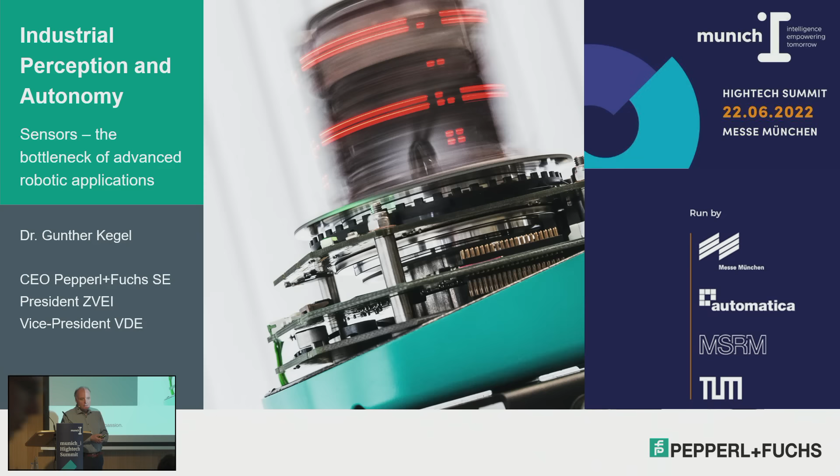Let me tell you a story that started more than 30 years ago. When I was a young scientist, we had at my alma mater in Darmstadt a science conference, and the young scientists were presenting their first ideas about AI. At that time, neural networks were still called amorph memories and stuff like this. Really the old days, and it was actually before AI was dormant for quite 2 decades before we had the computational power to restart everything from scratch.

Even there, we already postulated, well, it should be possible for us to beat a master in chess in 10 years, so by the year 2000, and a master in table tennis, or let's call it ping pong. There was self-confidence of young scientists over there, and guess what?

We managed the chess challenge pretty simply because of Moore's law. We had every 18 months duplication of computational power, and so the old algorithms of brute force actually did the job. We didn't do anything new, no new algorithm, nothing, just the old stuff with higher computational power, and the thing was done.

And what about table tennis? We have motorless drives, even robots that can actually move their kinematics in a way that they can hit a ball as precisely as a good table tennis player.

Unfortunately, we don't see the ball. We have absolutely no chance to predict the curveball. Unfortunately, the ball is white, it doesn't have any markings, so you can't see the momentum, the drill, the spin. Nothing is visible for you.

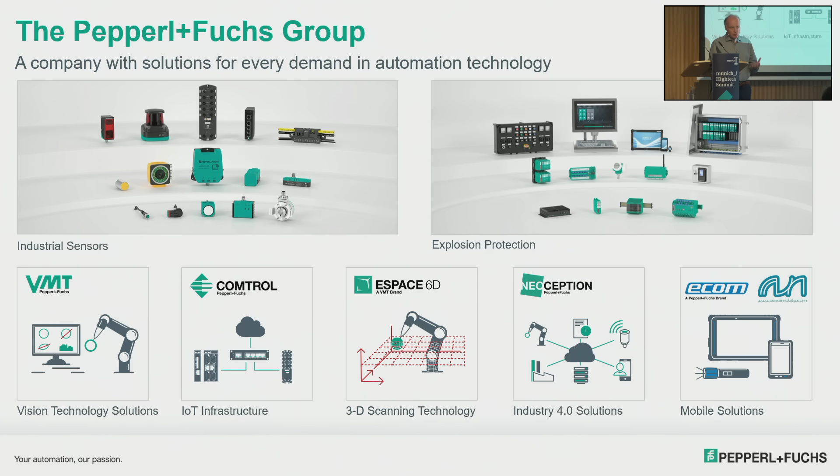So we are not having a lag in regards of AI algorithms. There's plenty of it, and we can use them, but we don't have the natural data, and it's coming from sensors which are simply too poor to generate the necessary data that artificial intelligence actually requires.

So we need to go on and do this, but unfortunately our own market, the industrial market, is much too small. If you would ask us, well, why don't you build a terahertz sensing platform like we just learned from URY? Because it basically absorbs several hundred billion dollars and the entire industry isn't able to finance this. So we need the impact, we need the technology transfer from other sectors which are much more quantity intense, such as gaming, very important for us.

There wouldn't be a simple memory device just for the industry purpose. Memory chips were going down in price when we all started with the first gaming computers like the VC20 or C64 in the early 80s. That was the starting point for developing cheap memory capacity chips.

Same with automotive. Each car today already includes 960 chips, so they are actually going forward. When they talk about autonomous driving, they need dramatically improved sensing capabilities.

We learned it this morning. Driving in a circle in Indianapolis, that's nothing but autonomous driving. I mean, do this - you don't have to go to Indianapolis to find the necessary traffic conditions. The inner city of Munich is already enough. With the many construction sites that they have, I can guarantee autonomous cars of today wouldn't run a single meter. They would immediately stop because they can't interpret what is around them.

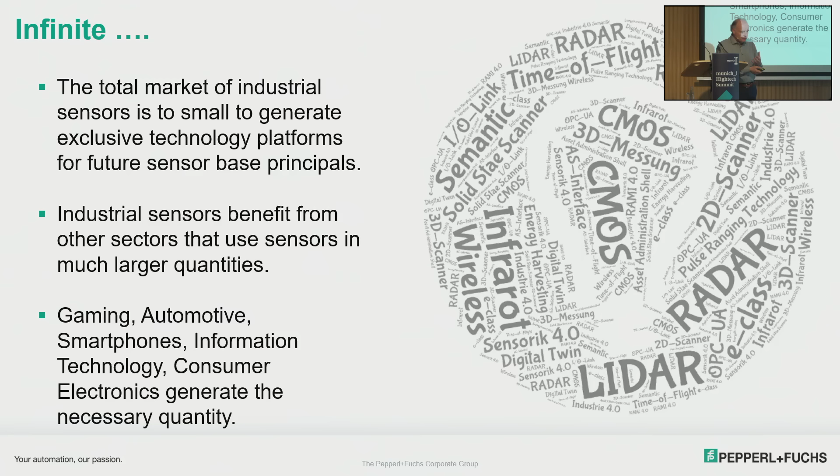So we need this in the industry, but we need it from other sectors because our quantities are simply too small to justify these massive investments. And what will it be? Now, LiDAR technology, for example, is something that we developed to a certain degree just for an industrial purpose, and it took us over 20 years to come up with LiDAR that really uses time-of-flight technology in a way that is applicable for industrial purposes.

Nobody buys this at a price of 20,000 euros. It has to be down at 2,000 or maybe 1,500 euros.

This is an accident, actually. The approach was that the inner city of Karlsruhe had some traffic accidents with the trams in recent years because the tracks were blocked, and that made the tram go out of the tracks and hurt people. So they wanted a sensor that could look at the tracks before the train arrived, as a kind of perception of the last meter. We installed it, but not in this way, but perpendicular to this, so that it could actually see the tracks. Accidentally, it scanned the entire city of Karlsruhe by moving through it.

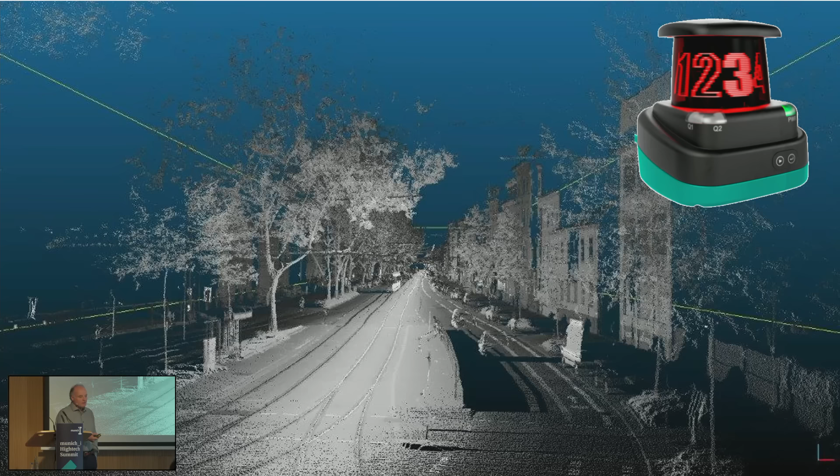But this is already something where you can apply a lot of specifically machine learning, deep learning algorithms to actually do something with these pixel cloud data. So that's much more in the direction of what we heard from UOI this morning. Simple sensors generating massive pixel cloud information, and then AI algorithms doing the job to interpret it and understand what's really behind it. So this kind of technology is a candidate for a more general or more universal sensor.

What we in industry do is take this technology and again slim it down and reduce it to serving just one application. For example, these transportation robots always have a problem if there's a forklift and you basically have a supervision of the floor. You can't see the forklift if the fork is up by only 10 centimeters. Then you simply run into the forklift, as you think the floor is clean, but it's not because the forklift's fork is elevated by some centimeters only. So we use this sensor to just have 4 lines, and that's enough to check out whether there's a forklift and to identify a pallet and stuff like this.

So this is not a universal sensor anymore. It has the same time-of-flight LiDAR technology, but it's reduced into an application-specific requirement, by reducing the universal behavior of the sensor. But this also means it can't be used for anything else but just this particular information. So we can do other things like guiding structures because we are in an industrial environment, and don't forget, industrial environment is highly artificial. It's not like an environment for humans where everything is designed for human perception, recognition, and prior knowledge. Our industrial world is much simpler and can be handled with much simpler sensors.

For example, this is a system where you actually have these QR codes stuck to the ground, and the sensor makes sure your AGV, for example, has correct positioning. The nice invention here is that it's fail-safe positioning, because we use multiple colors in the QR code and blend in and out the colors, having redundancy this way. So we make sure we are not misreading these QR codes and have a safety integrity level 3 as functional safety. So you can use it for positioning AGVs even when there's human traffic around.

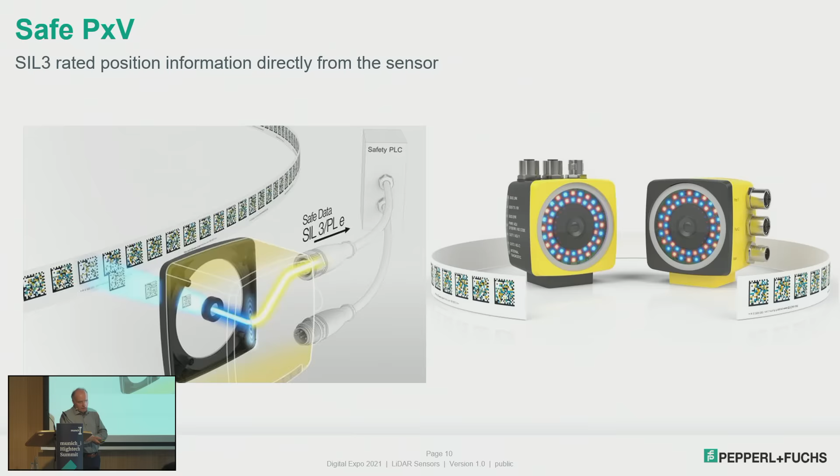We all know this from optical illusions. How often are we actually tricked by optical illusions with our stereo cameras? By the way, our stereo camera has only a base width of 10 centimeters, so at a distance of 10 meters, this isn't helpful at all. But still, I'm able to know that this tree is farther away than the other. How do I do this? I can do this even with one side blinded, because I know how to interpret light, shadows, and these things.

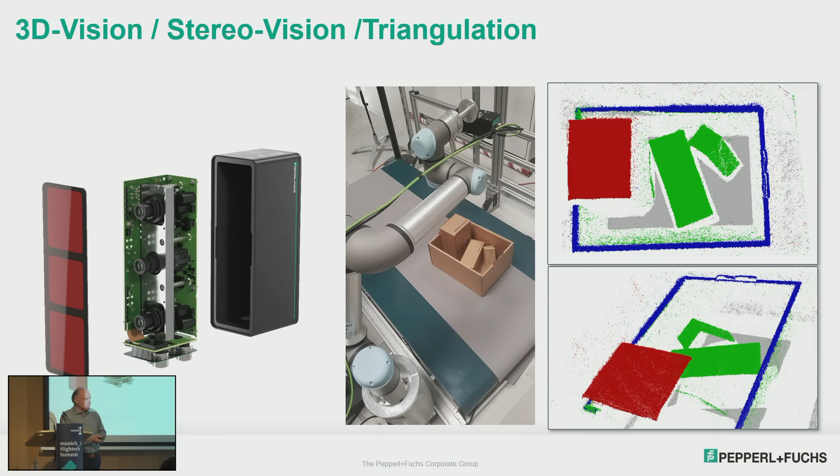That is a priori recognition capability that I have that robots lack. Maybe we can learn this with AI. Maybe we can learn this with deep learning.

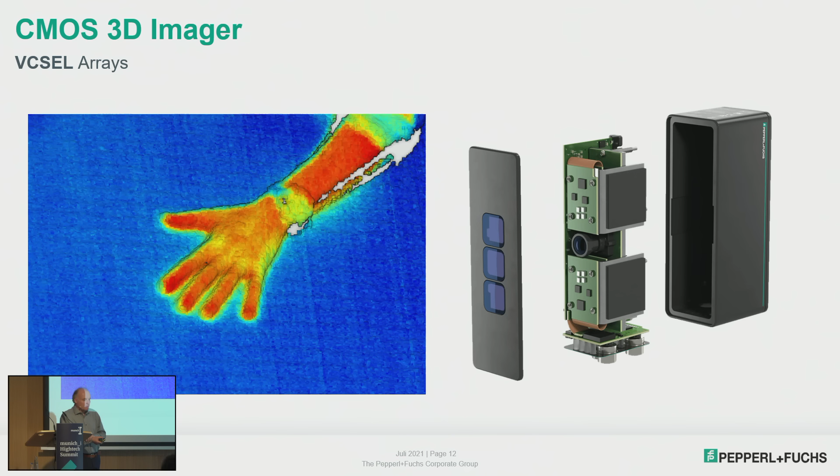We are going into the direction of higher resolutions with these VCSEL arrays. These are the active illuminating chipsets behind that look like these 3D imagers. They are extremely poor at the very moment, very, very sensitive against ambient light. So whenever there's sunlight coming into the plant, forget your imager, it doesn't work any longer.

So we still have to work some more generations to have 3D imagers. We hope that the information and communication people will integrate them into the next iPhone, that your iPhone doesn't take simple pictures, but 3D holographic pictures. If that's an application, quantities will run into infinite numbers. This could be a technology we can apply nicely in the industry to really obtain more universal sensors. And then we could basically have an entire manufacturing surrounding in a 3D image.

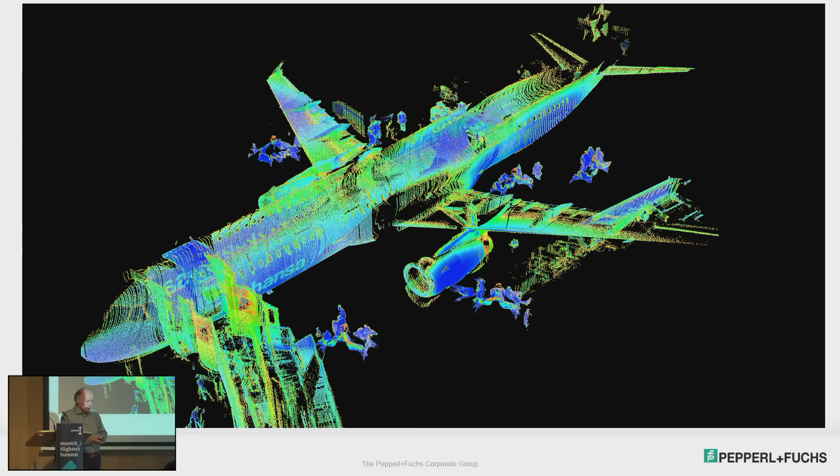That's already a 3D image, but it's not real time. It takes something like 20 seconds to get an image of this, and this is only for demonstration purposes. But actually, we are currently using this kind of technology in the major assembly of aircrafts, because this is today a completely manual process that takes several days to have the right alignment of the different body parts over there. And you can automate this if you only have 3D pixel-related information of the entire machine.

You can see the different images. We even combine the time of flight 3D measurement with photoelectric color information. We call this Pixel Plus, because that makes it easy for humans to follow what the machine is doing, because we are very much linked to these colors. Machines are not, and therefore we at least have a nice way to actually show this at any kind of human-machine interface in a nice way.

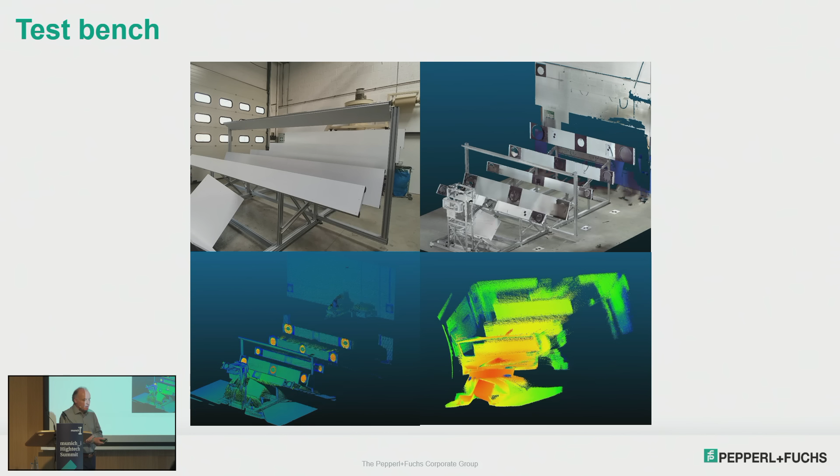But interpreting such a scene and then understanding what do I need to do over there is something highly complex and yet not solved. And that's where AI actually kicks in.

So let me summarize. Sensor technology development is still the bottleneck and prevents faster progress in advanced robotics more than any other technology. It's not that we need quantum computers or whatever blockchain technology. First of all, we need better sensors if we want to proceed. We need to put effort in developing the next generation sensors.

And yes, terahertz sensors will be something like this, but we are not talking about 2 to 3, but 20 to 30 years before we have this technology. I can tell you because I went through these last 30 years, and we had the same assumption 30 years ago. We will do all these jobs in 5 to 10 years, and even 30 years. We haven't been able to do this.

And science, especially automation science, is not like a ketchup bottle, where you basically put and somehow plunge into there. It is a continuous process of improvement, and therefore I don't think that we should have high hopes that all of a sudden there is the universal sensor and there is a universal interpretation. It's hard work on science, and it's hard work in industry to do so, but I think there is a continuous process of improvement, a continuous process of having better sensors, but it's not so fast like we all thought 30 years ago, and like we maybe even today still think.

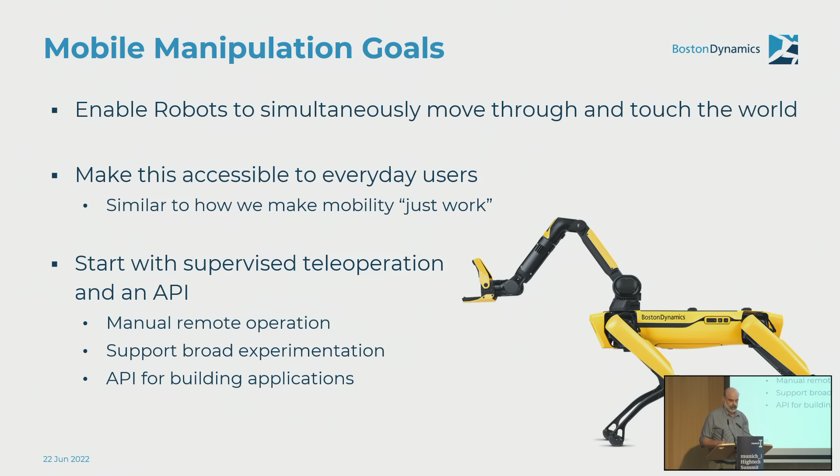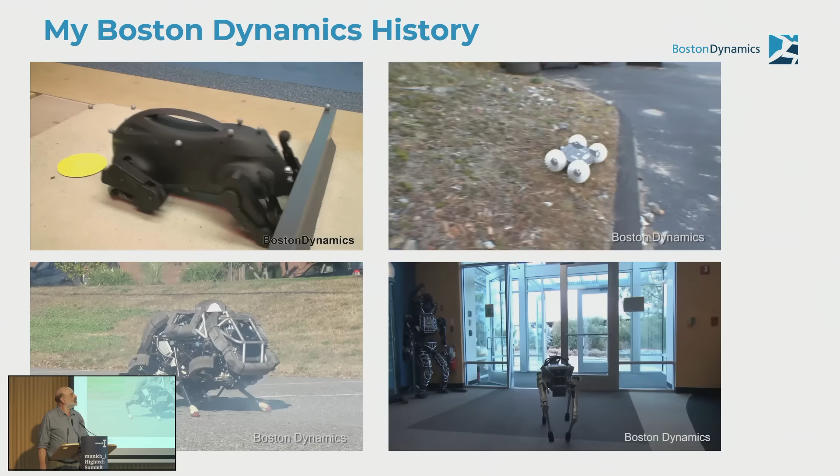A little bit of history. These are projects I've worked on at Boston Dynamics, shown in four simultaneous video forms. The first thing on the top left is a robot called Little Dog. This is actually a project I worked on literally day one when I started at Boston Dynamics in 2006. We had to develop the hardware around this robot and deliver it out to a bunch of university groups who used it to do research on machine learning related to locomotion.

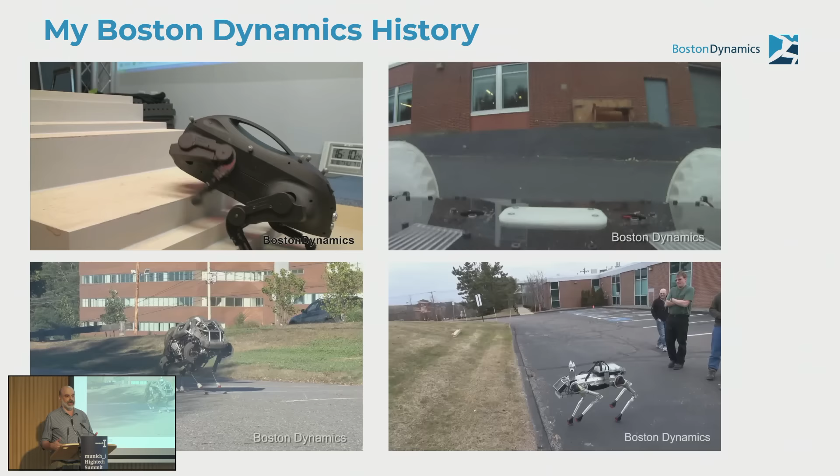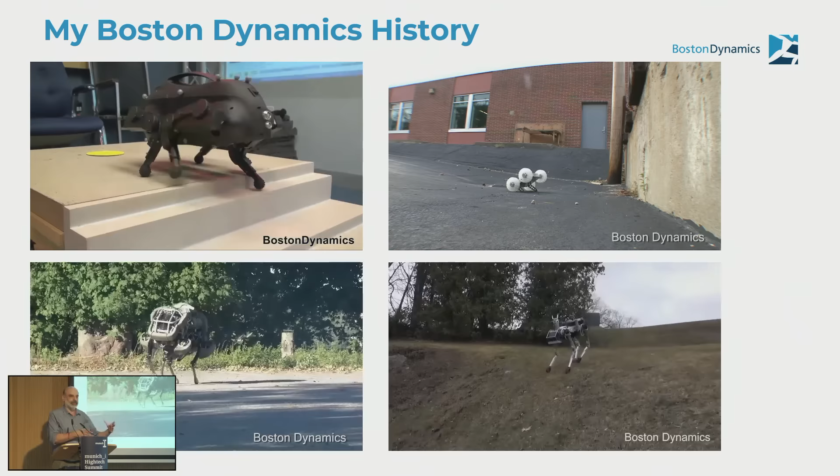The sensing problem was completely taken out of this particular project. The teams had prior maps of the environment they were going to locomote across, and there was an external sensing system, a motion capture system, that kept track of where the robot was relative to that terrain. So there was no sensing.

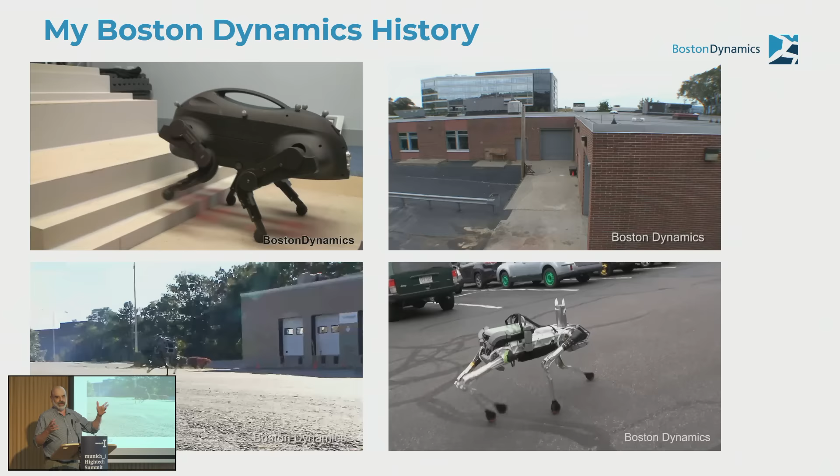The second thing is a robot we call Flea. It's a little differential drive robot, except it can hop, and it can hop 10 meters. It can actually do that 30 times. The trick is, and nobody gets it, everybody thinks we wind up a spring or something. No, that's actually an internal combustion event. There's a piston that we fill with fuel and light off to launch the robot.

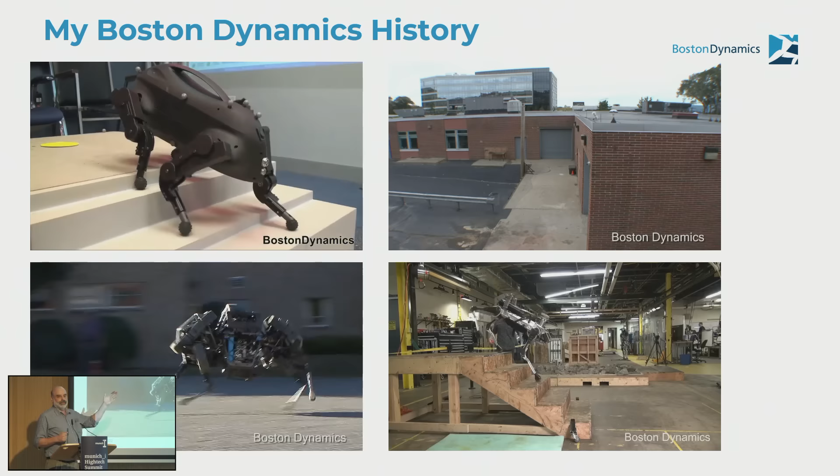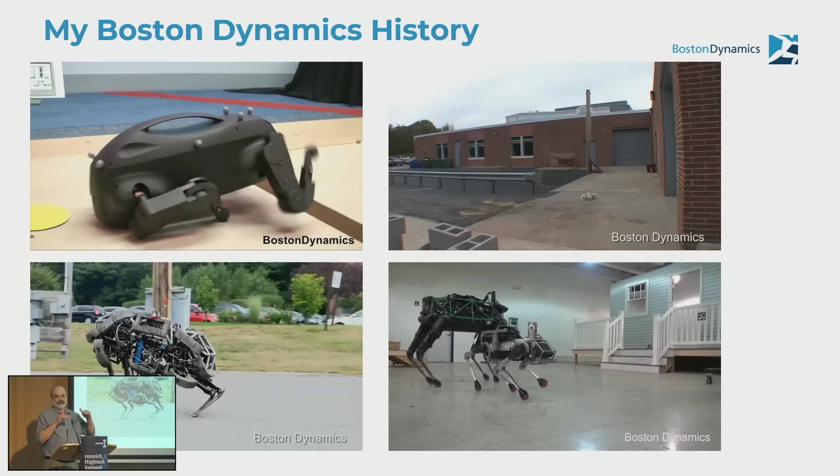The sensing problem here was that the robot needs to land reliably. There's a whole bunch of really creative mechanical engineering in the design of the wheels and things. But we actually had to have a flight control system on the robot so that it could control its orientation and land on the wheels in order to let the wheels work and absorb the landing shock. So there's an inertial measurement unit in the robot, and a relatively simple control system built around that stabilizes the robot in flight.

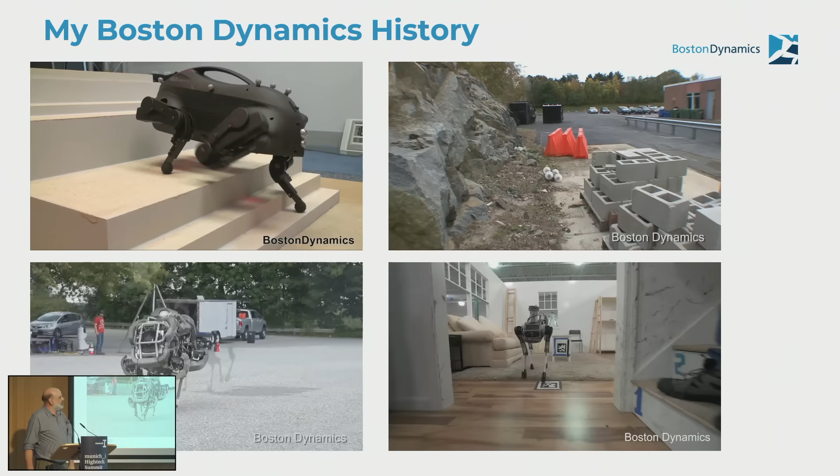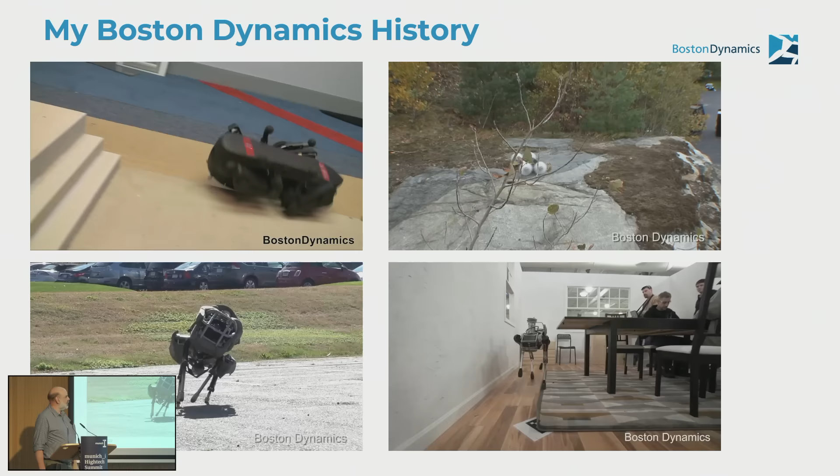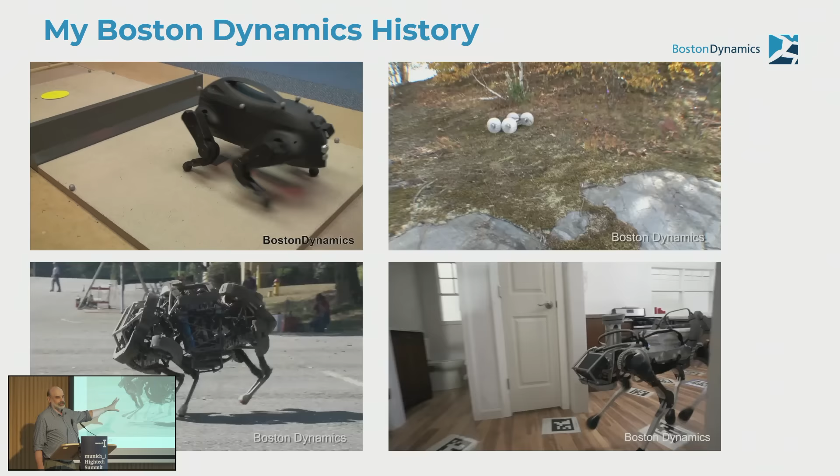The bottom two videos are two of our quadruped robots. This was a robot we called Wildcat. This machine could actually run at about 20 miles an hour across a parking lot—not difficult terrain, not laboratory floor terrain. It was fairly maneuverable, fairly capable. This machine is blind, right? The only sensors it has are an inertial package inside the robot, and then proprioceptive sensors in all of its joints, measuring positions and forces, or surrogates for forces, in all the joints. That's what allows us to run really quickly.

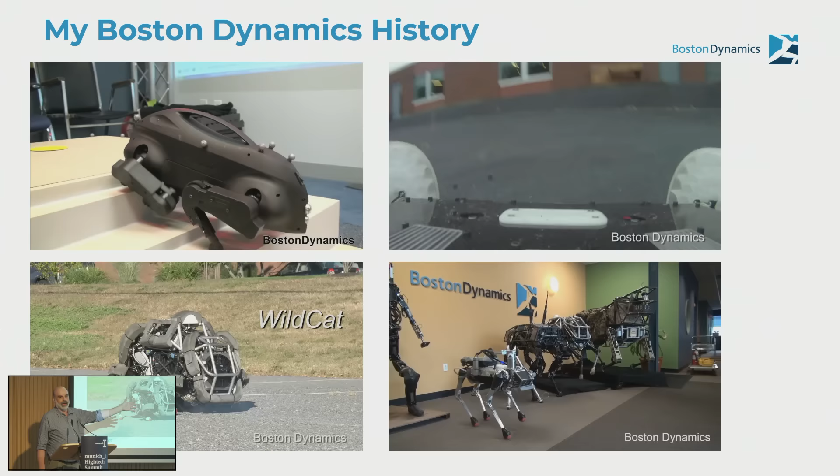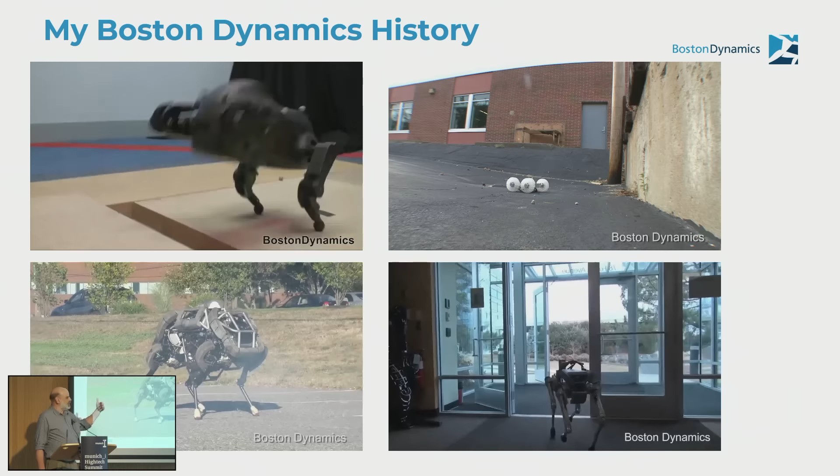The last video, which we don't show that often, is the early prototype of the robot we now sell as Spot—what we internally call Spot version 2. The distinction here is this was the first time we built an all-electric quadruped. Again, the sensing here is relatively simplistic, and yet it has really good mobility capability. That comes from this idea of building these low-level behaviors and capabilities in a very reliable way and building upon those to get to the higher-level capabilities.

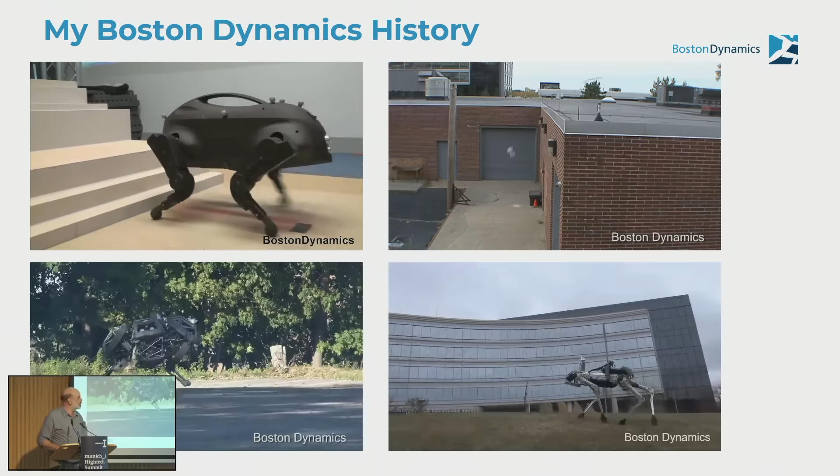So I'm going to talk about how we use sensors in a smart way. We can put a lot of sensing on these robots today thanks to advances in all these different industries and the availability of technologies that I certainly didn't have access to even 10, 15 years ago. Locomotion builds upon this idea of minimal sensing—we have locomotion control technologies that work very well even when none of the sensors on the robot work. It blindly takes steps.

When the proprioceptive sensors are working right and the robot can feel the ground, it walks much more effectively. When some of the exteroceptive sensors, the cameras on the robot, start to work, then all of a sudden the robot can actually plan its footsteps and be very intentional about how it gets through terrain.

As we transition to doing manipulation, the burden on the sensing becomes much higher. Manipulation, reaching and touching the world, requires much more delicate and precise interaction with the environment, and thus more sensing. We're trying to do the exact same thing we did with locomotion: use relatively simple, low-level behaviors that aren't very dependent on external data, and build on those to produce more complex behavior.

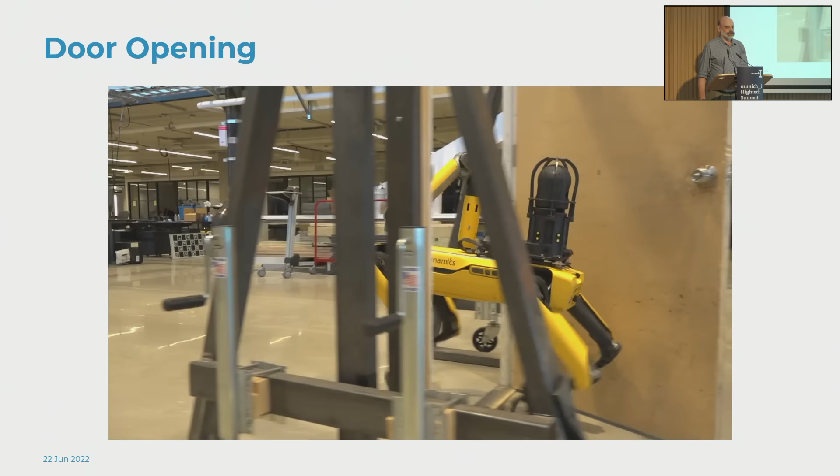So at its core, this is an autonomous behavior. There's a little bit of human input and supervision at the very beginning. Right now, when the robot's looking up, the operator is saying the door handle is about there, and this is a door that opens towards you on the right side. Once the robot knows that, it reaches out with the arm.

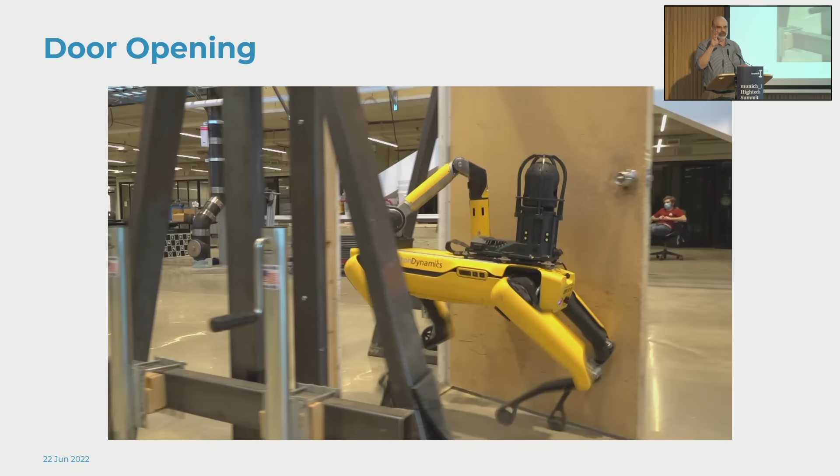The arm has a set of sensors in the end effector, in particular a depth camera, and it uses that to actually find the door handle. It's not using a very precise model for the door handle - it's basically looking for a blob of points protruding above a plane. Once it sees that, it does a servoed motion, a visually servoed or sensor-servoed motion, to actually grasp the doorknob.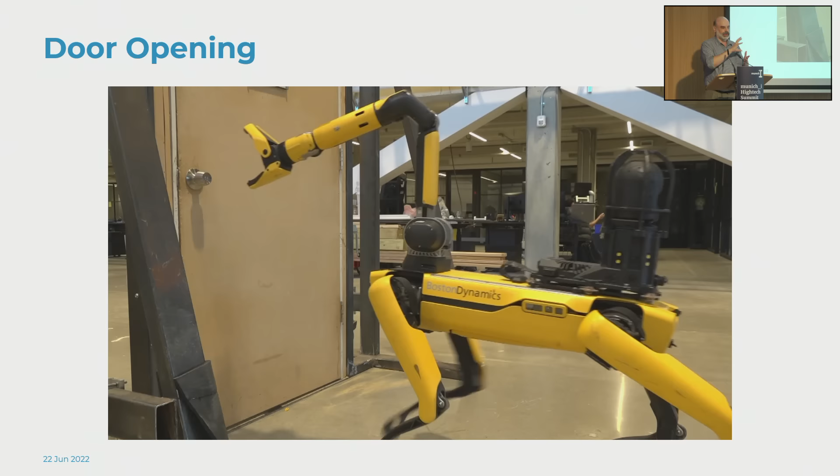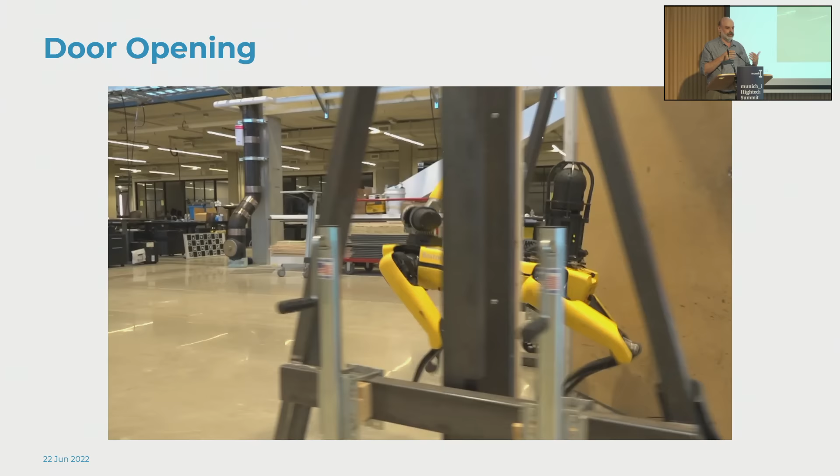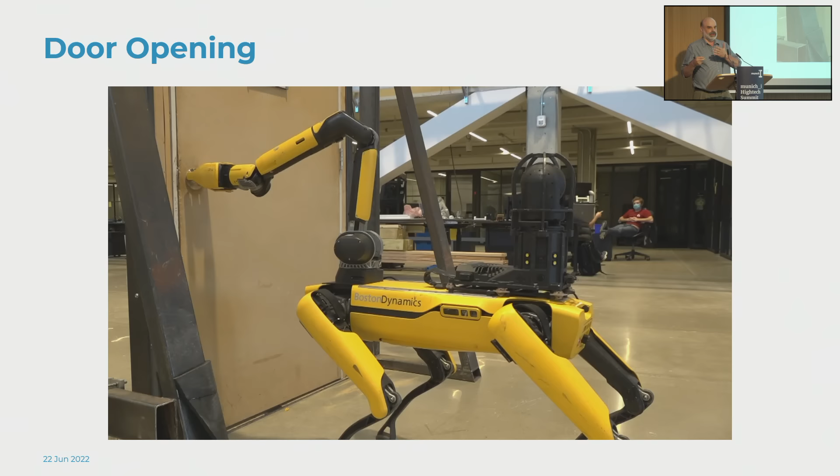Once it grasps the doorknob, it transitions into a set of impedance or force-controlled behaviors that allow it to effectively turn the knob and open the door. If we don't tell it that the door opens towards you, it'll try pushing and pulling to decide which way it actually moves. We don't have a precise estimate for where the hinge is, so it's not highly model-based - rather the machine feels, as it starts to pull on the door, where the hinge is, and as a result knows where to put its foot to block the door and hold it open.

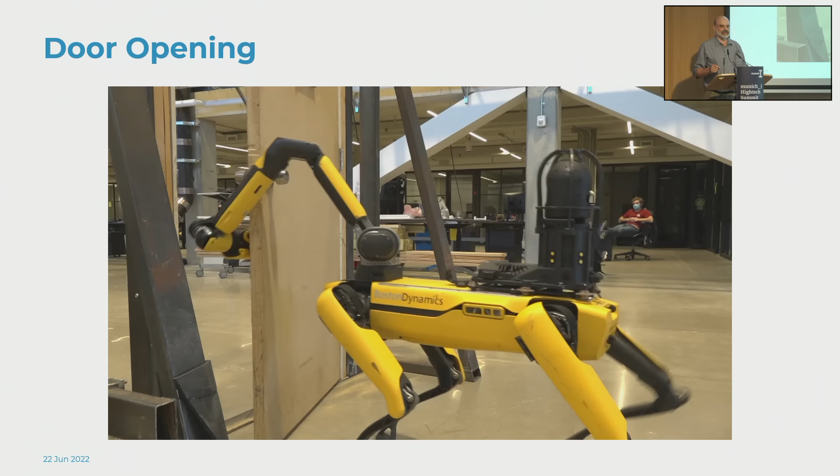So this is that idea that there's a whole bunch of information available to the machine that's not coming from what we would traditionally think of as sensors, which allows it to be effective at doing this kind of behavior.

If you're going to do mobile manipulation, you better coordinate all of this stuff. We really need to coordinate body and arm motion - you see a particular example of that in the door opening case. We do need sensors to help us adapt to unexpected events in the environment. We're relying primarily on imaging sensors and depth sensors, whether those are image-based depth sensors or time-of-flight depth sensors. We'll use whatever fits in the packaging we have available.

We build relatively graded APIs on top of that. If you want to control kinematics of the arm, you can do that. If you want high-level grasping commands, we'll allow you to do that. We'll let you program impedance. The door opening behavior I showed you is something you can actually build on top of the robot as we sell it, up to the point where we put the foot in front of the door - that's the one thing we don't expose externally.

And so this is just a video that gives you a little bit of a summary of what we can do with robots. Yeah, we can play jump ropes.

Those two robots on the end are coordinating, doing things in a coordinated way to swing the rope. We can go out and pick the trash up. This is an almost essentially autonomous behavior, using relatively simplistic high-level vision tools that look through the robot's cameras to find the objects.

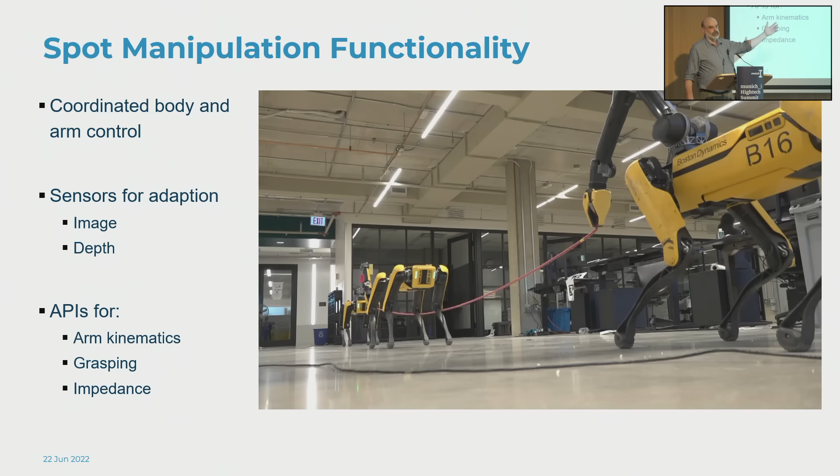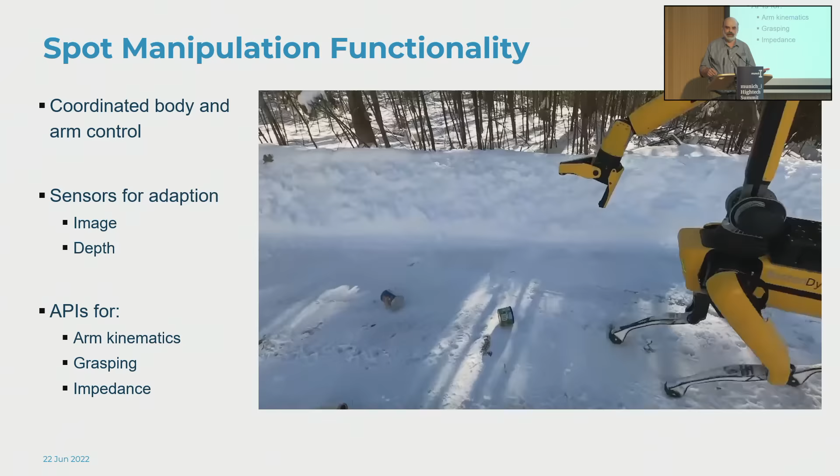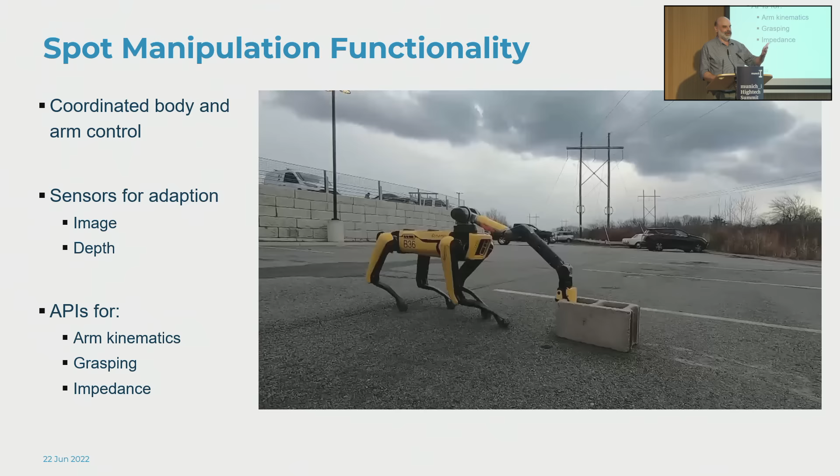We can go do chalk drawings on the parking lot. That's actually a little bit trickier—you need the right kind of impedance control to effectively drag the chalk across the rough parking lot and not get stuck in the cracks. The person working on that had a very strong computer science robotics background, and he said, 'This will never work.' I said, 'Oh yeah, we just got to turn this term on in the controller.' Sure enough, a week later, it all worked really well.

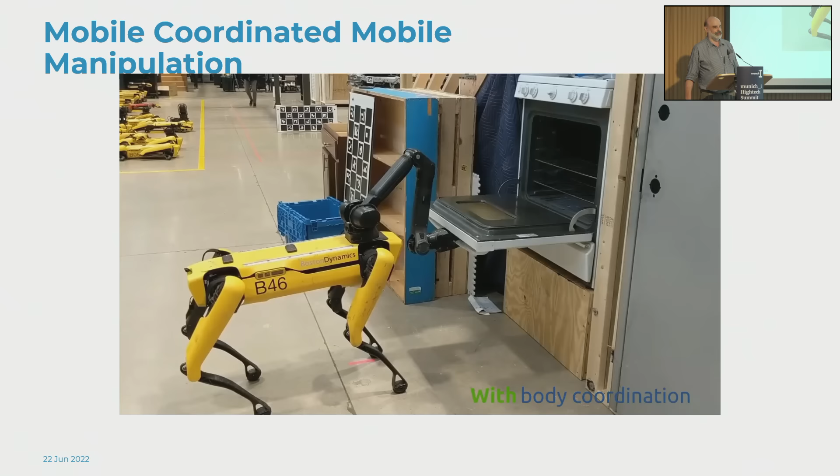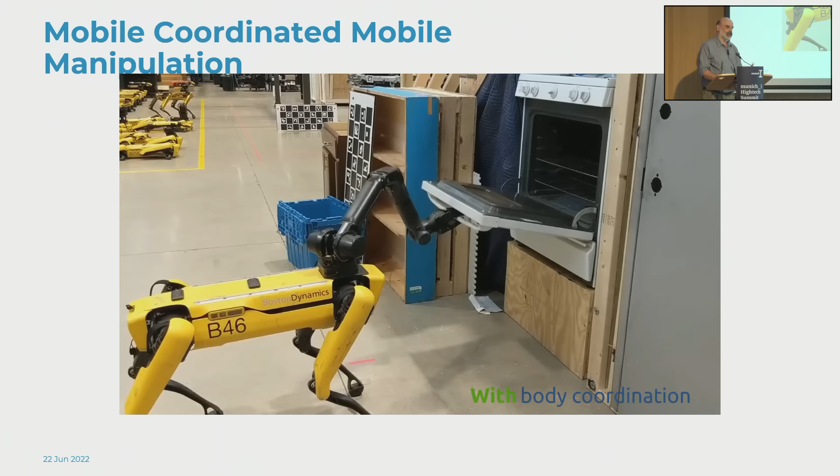That gives you a sense of the kind of things we're trying to do and how we're putting those together with relatively minimalistic sensing, trying to build up towards a capability that really leads to effective autonomous mobile manipulation. I'll stop there. Thank you very much.

It looks like we'll have soon robots that will not only wash the dishes, but also take them and put them in the drawer. Hopefully make the cookies for you as well.

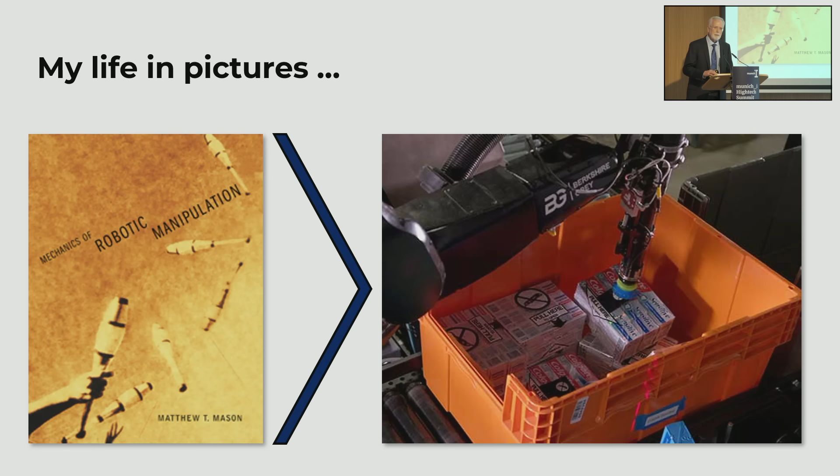So the plan for this talk is to talk about a transition in my life. Most of the time I worked at Carnegie Mellon, and my goal was to publish papers and the occasional book, and sometimes in order to do that you had to do some robotics. I focused almost entirely on robotic manipulation ever since 1976. Then a sudden transition happened, and now my goal is to pick toothpaste out of a bin. So maybe there's something that can be learned. You can view this as setting the baseline and that as the experiment, and we can see whether I learned anything from the transition. I'll talk about that a little bit at the end, lessons learned.

But you might ask, what happened? When did this event happen and why? I can tell you exactly when it happened, it's still on my calendar. On May 6, 2014, I got a visit from Tom Wagner, who is the founder and CEO of Berkshire Grey. At 10 a.m. that day, I thought that there would be no immediate applications of autonomous robotic manipulation beyond factory automation. You can go down a list of different ideas, and I didn't believe in any of them, except for the Roomba — I was right about the Roomba. But some people don't know that the Roomba is manipulation, right? It's picking up little particles of dirt. So that's an exception. And then two hours later, I was convinced.

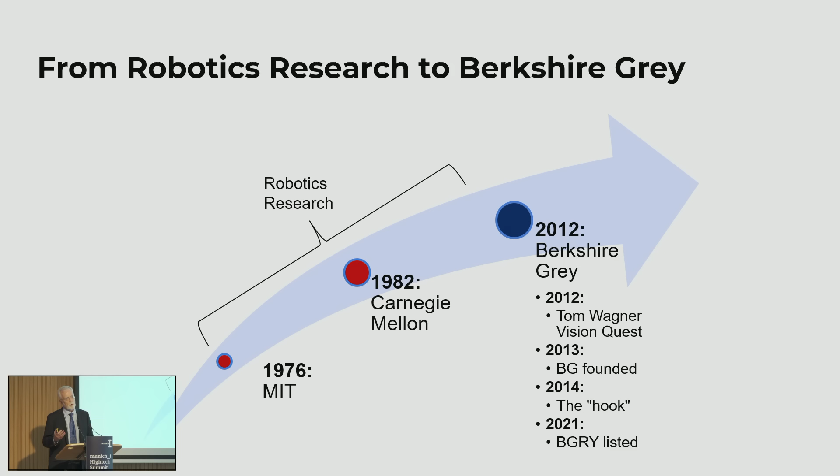But anyway, let's see. So yeah, BG was founded. There's me getting hooked. And then 7 years later, Berkshire Grey went public. We're listed on NASDAQ, and we're actually the first robotics company in the United States to go public since iRobot, like 16 years ago. So I was surprised by that. You would think that was a more common event, but it's pretty rare.

So I'm going to talk a little bit about the technology, and I'm going to show you a few systems working. Where the technology started, the thing that I was focused on

is each picking. And there's a little bit of jargon. There's a hierarchy, a sort of recursive packaging hierarchy in logistics. You have containers or trucks - a truck's just a big box on wheels. And then inside of that, you have pallets. And then inside of that, you have cases. And then inside of that, you have boxes, right? So there's this recursive packaging hierarchy. And then at some point, you get down to eaches. And you could go even further. I guess an each is identified as the thing that you would see on a shelf in a retail store or in a grocery store.

And there are a lot of systems that can pick pallets - we call them forklifts - and systems that can pick cases, these big suction arrays. But picking eaches is special because there's such an enormous variety of things. Just think of all the things you see when you walk into a big retail store. It's an amazing variety, and you need a system that can pick all of them, and that's where we started.

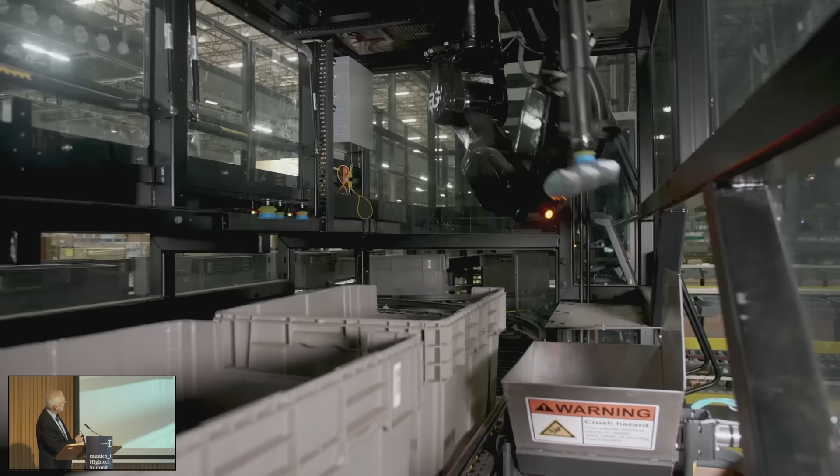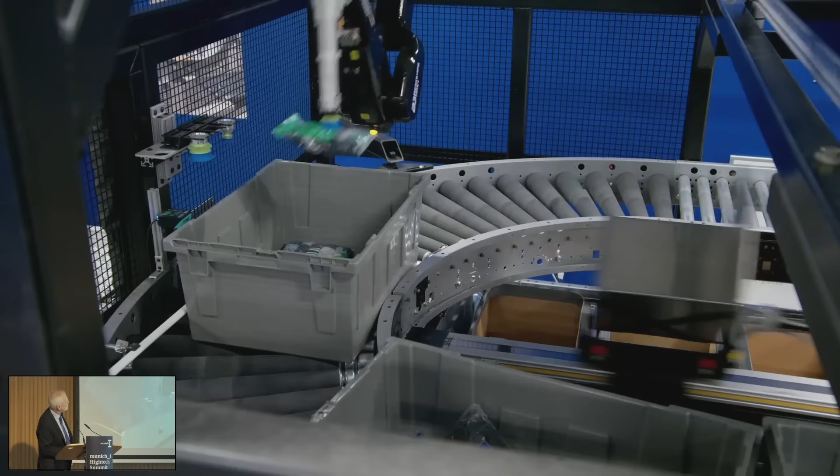So I'm going to show you a montage of several of our picking things, and we'll come back and look at some of these systems in more detail. So there's our gripper, and this is an early version of it. There have been some refinements since then. The point is that it's picking a lot of different things.

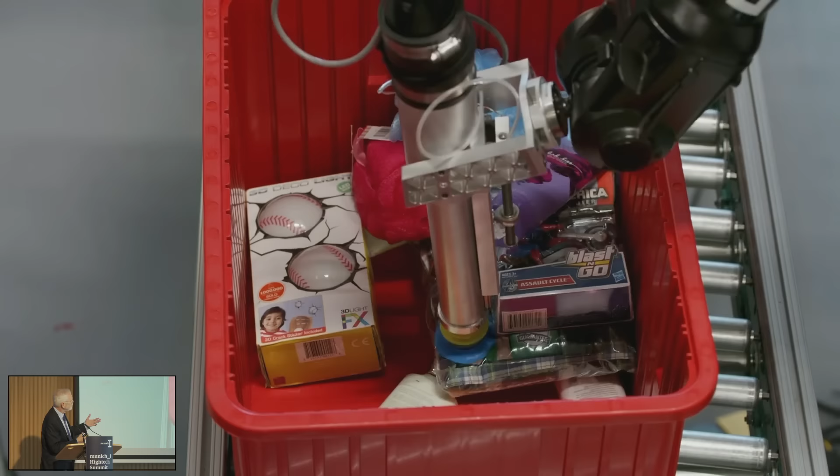So here are some loose bags of apparel. Here are some rather heavy bottles. Bags are interesting for vacuum because they have wrinkles, and the wrinkles let air in, which is bad. You can buy special bag grippers, but we don't want special grippers, right? We want general grippers. So one thing that's key here is vision, and the vision is figuring out where to grasp things. It's also very quick because the things move. So right away, it's figured out the next place to grasp.

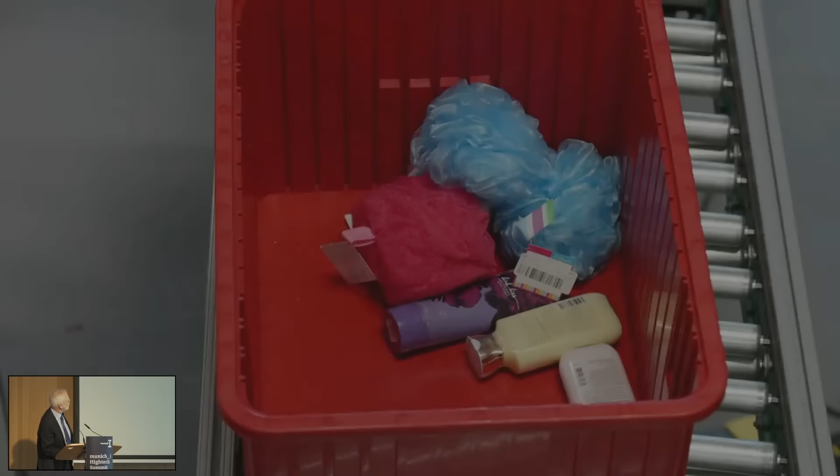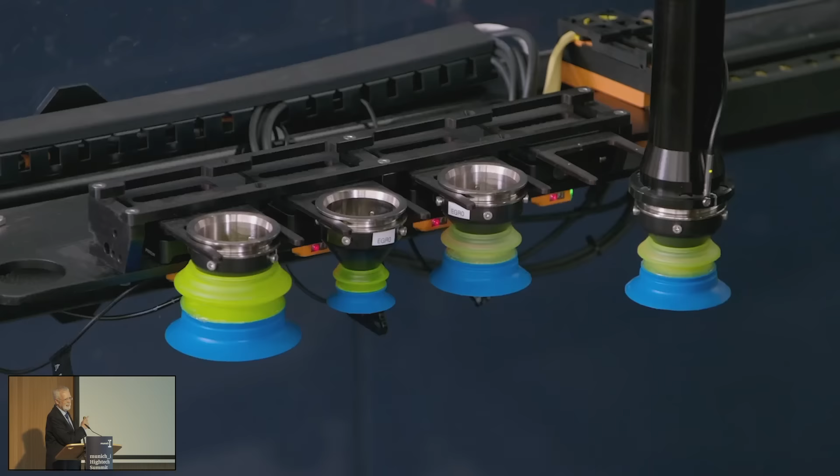But this is the thing that I'm most proud of, because it grasped that thing right across a seam. There's no way you can get a seal across that seam, and most vacuum systems struggle with that. It can even pick these porous things, these bath sponges, or a baseball cap. Being in the Pittsburgh office, I find this video really annoying - I don't know if they did it deliberately to have me pitching a Boston baseball cap, but here it is working in the back of a grocery store.

So as far as I know, I've never seen another system that can pick the variety of items that our systems can pick. And it doesn't just pick, it also packs. In this case, it's doing e-commerce order fulfillment. That box is going to be closed, and the plastic you see there shrinks, and that box gets shipped directly to a consumer.

So let's look at a couple of things in more detail. One thing that was part of Tom Wagner's vision at Berkshire Grey was he did not want to just sell a component, just sell people a robot. We sell whole systems—the upstream conveyance, the downstream conveyance, all kinds of surrounding stuff. Because if you just sell a robot, you don't get the full value you get if you can optimize the entire system, since the operating characteristics of a robot are different than a human.

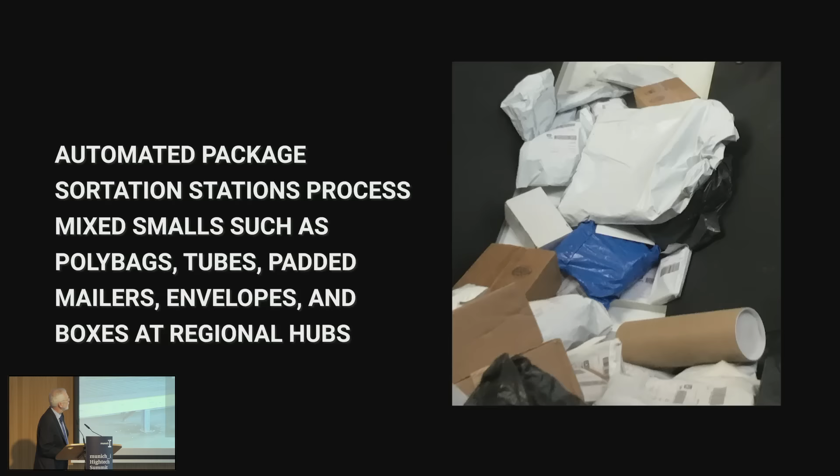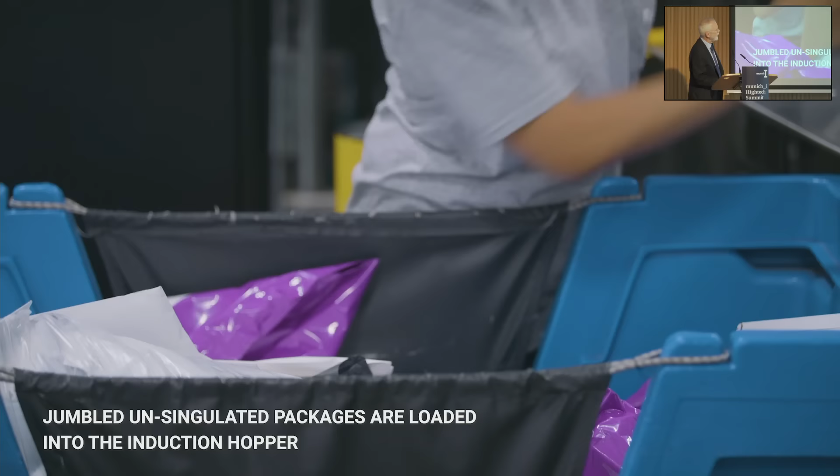So this is a sortation system. This is installed in some FedEx facilities—this is a shipping center. Again, you see a large variety of items: an awful lot of bags, but also boxes, flat envelopes, round things, cylindrical things, and these annoying triangular cylinder things that are a challenge.

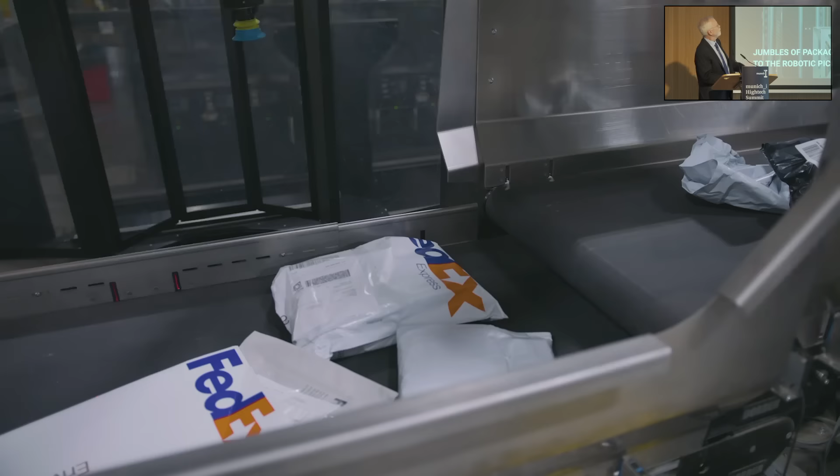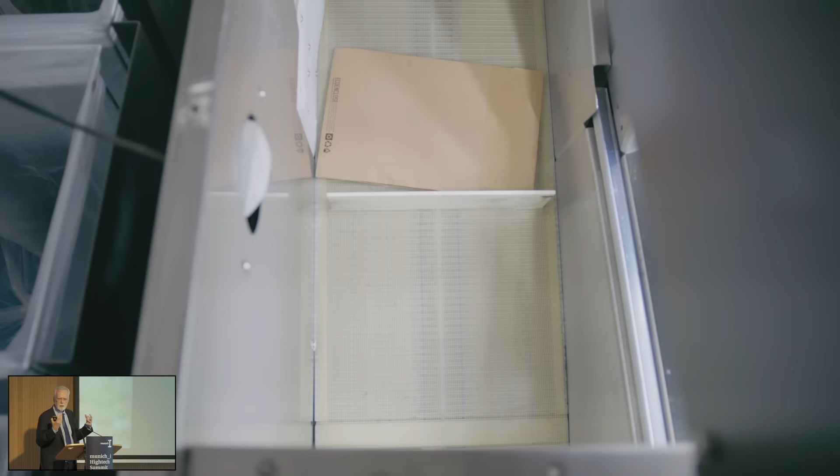So a human tosses the bag of stuff into the conveyors, and it drops through this vertical scan tunnel, which is also a Berkshire Grey thing. It can pick up the barcode in whatever orientation—there's lots of lights and lots of cameras in there. I don't know exactly why, but it also does a really good job of picking up barcodes even on wrinkled plastic things, which can be a challenge because the wrinkles can obscure the barcodes.

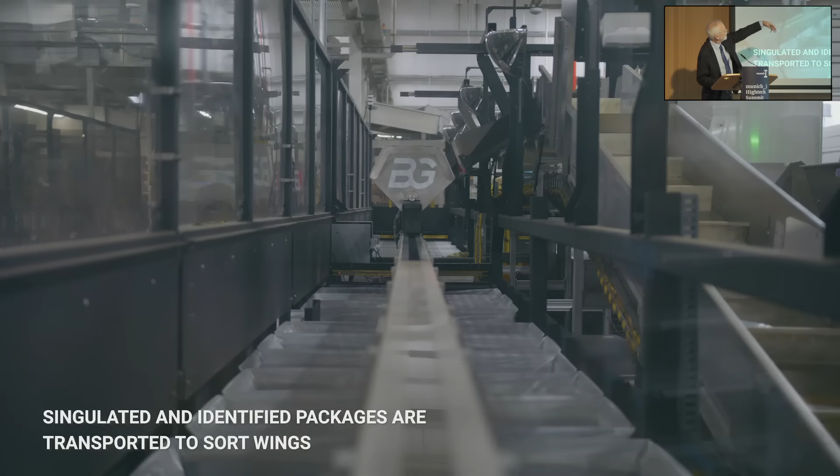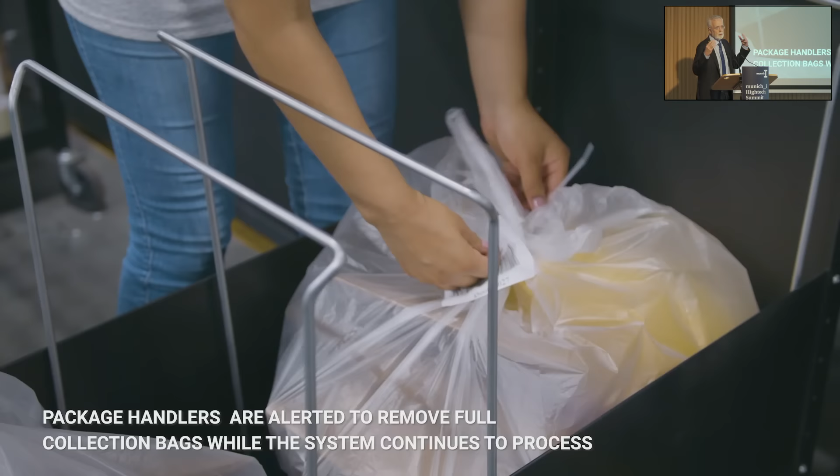As it comes out of that hyperscanner, it's singulated, identified, and kicked into one of these linear shuttles. This is a different configuration of conveyance than you usually see—this linear reciprocal setup, somehow our guys came up with that as a better fit to the characteristics of the robot. It's also very modular, scalable, and doesn't take up as big a footprint as some competing systems. We'll see another application of that linear shuttle in a moment.

So that's our stuff working in a shipping center at FedEx—that's the only customer I'm going to name. There's contracts and stuff, some names aren't really secret, you can find Berkshire Grey mentioned in the quarterly earnings reports of other retailers, but I'm not allowed to say the names. You'll have to do some research.

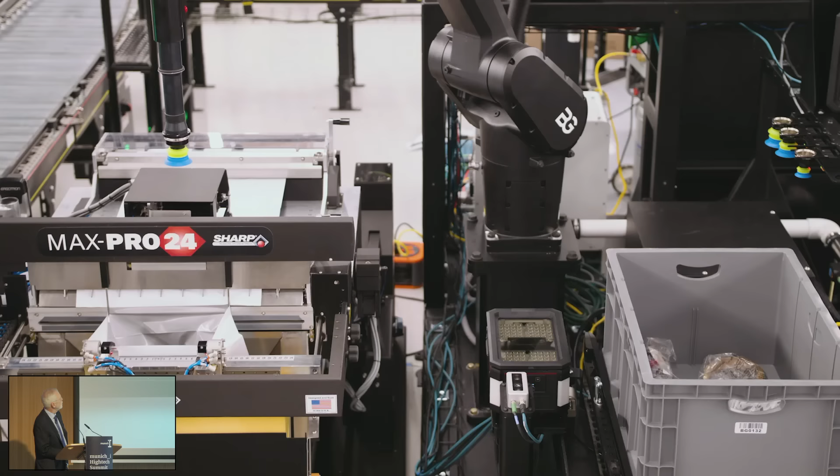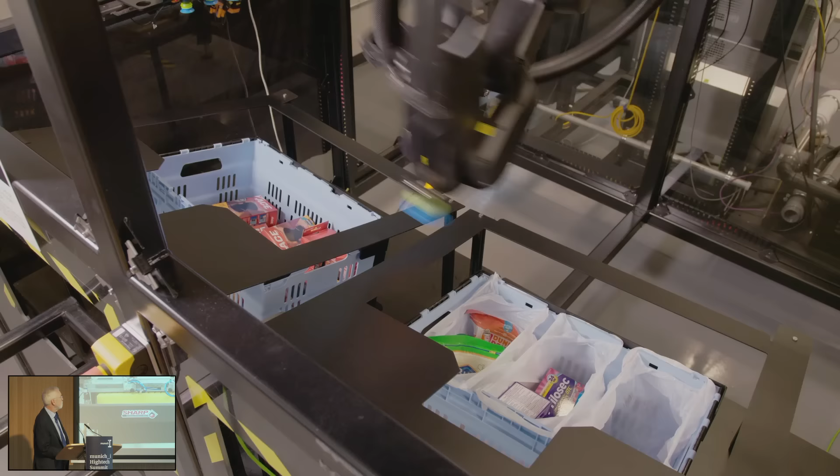So e-commerce—this is a system called a put wall, which is something manual picking uses; humans use this. This is an auto bagging system, feeding items and dropping them into a machine that automatically closes the bag.

This is the grocery packing system, which you saw a glimpse of before. Here, pose in hand is an issue—there's an intermediate camera that pauses briefly to get a snapshot, so it knows exactly where that object is relative to the gripper, because you need some precision when placing it into the bag.

Okay, store replenishment. Initially you think it's all about e-commerce—e-commerce is growing at a dramatic rate, and yet it still has a long way to go. The vast majority of retail is still happening through brick and mortar stores, so we have a long way to go on this.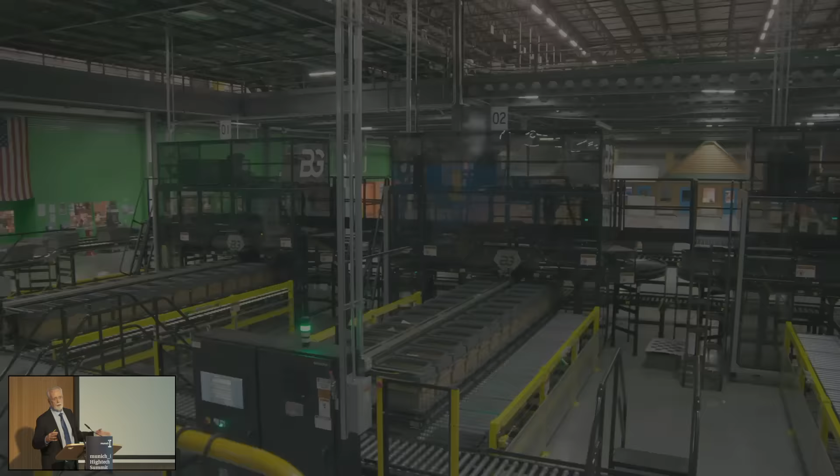Well, why not help the brick and mortar stores with these systems as well? So store replenishment: big retailers have regional distribution centers, and each distribution center serves several local retail stores, which order things to replenish their shelves. This system uses four of those linear sort wings in parallel to replenish stores. The gray bins here are inventory coming in from an automated storage and retrieval system, going to our picking robot.

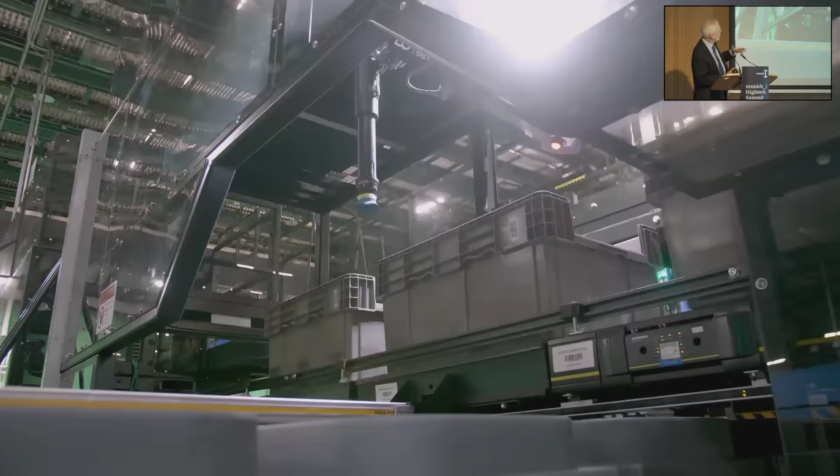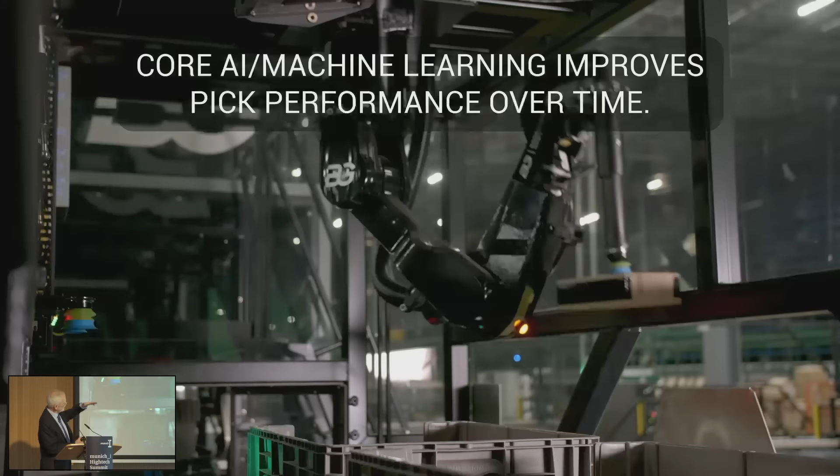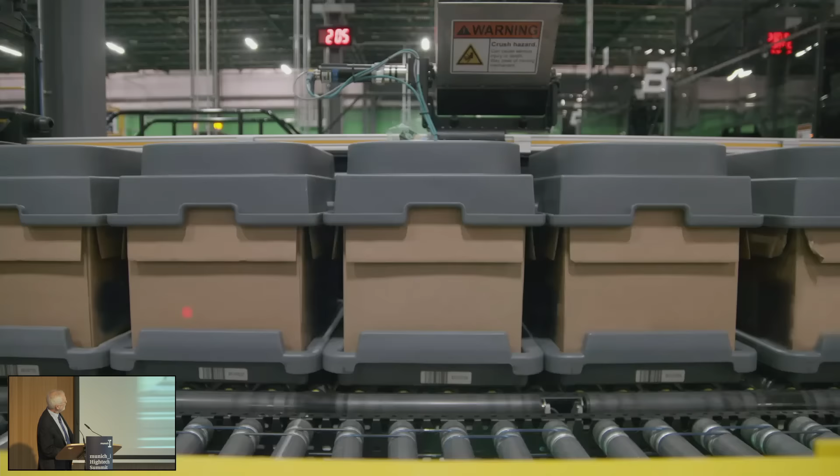The picking robot drops it into another one of those linear shuttle things, now dropping it not into a bag but into a box. Those boxes have a plastic tray and a plastic cap because an empty cardboard box doesn't convey very well on ordinary conveyors, and the plastic cap holds the flaps down and lets us fill the box more efficiently. Each of those four systems is sorting to several boxes, which are getting fed automatically.

So unlike the FedEx system—am I running out of time already? Okay, anyway, the induction and the extraction here are happening automatically.

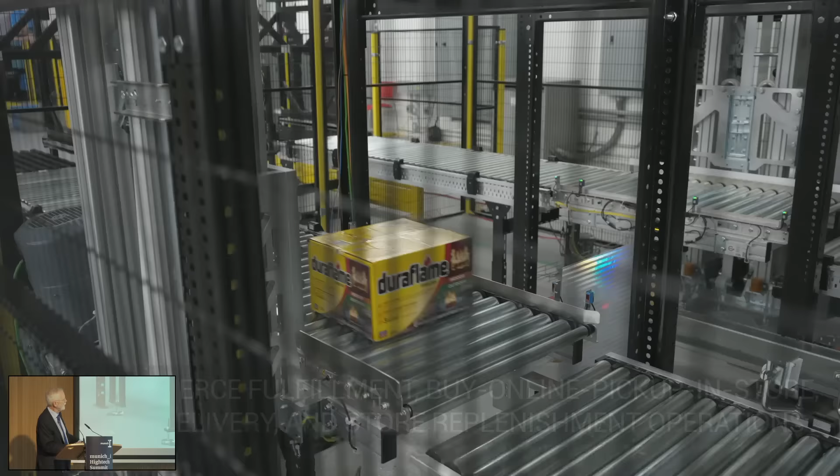In that case, I'm moving on. This is another store replenishment system. Now, this is obviously a different philosophy. So instead of the linear sort wings, now we've got a 2-dimensional array for distributing stuff.

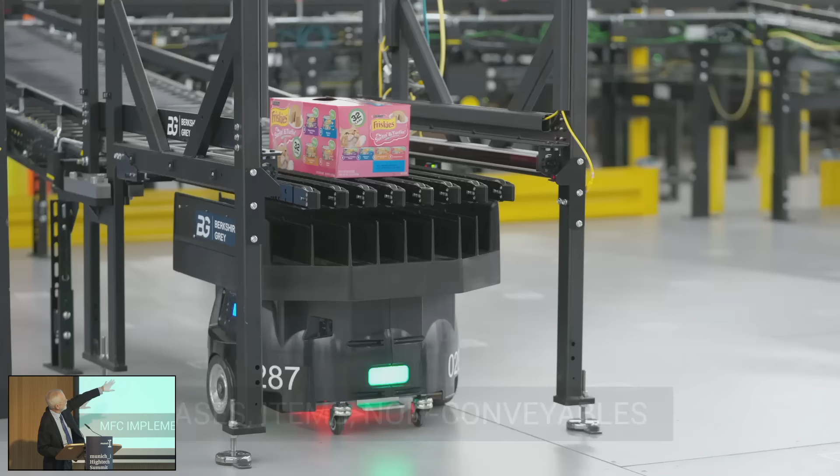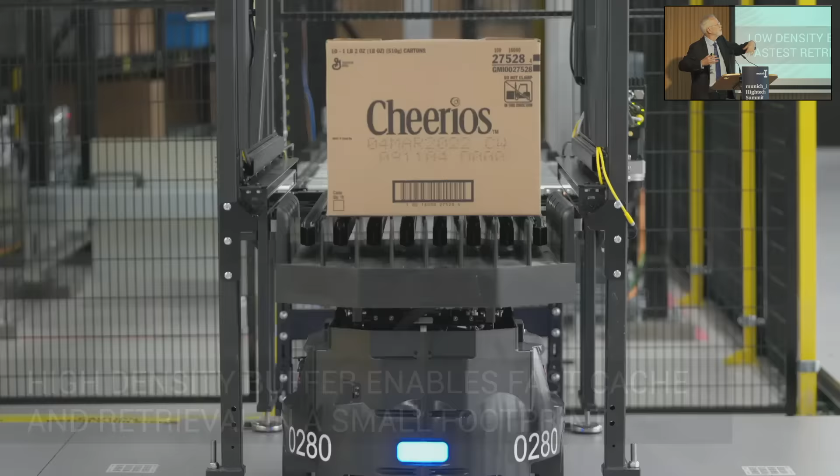We've got a fleet of mobile robots. We've got a high-density buffer in the middle. What's not shown is there can be an automated storage and retrieval system. To think about this system, think about it like memory cache, okay? You bring out a lot of inventory onto the floor, and that stuff can be handled in a much more agile way by this fleet of mobile robots.

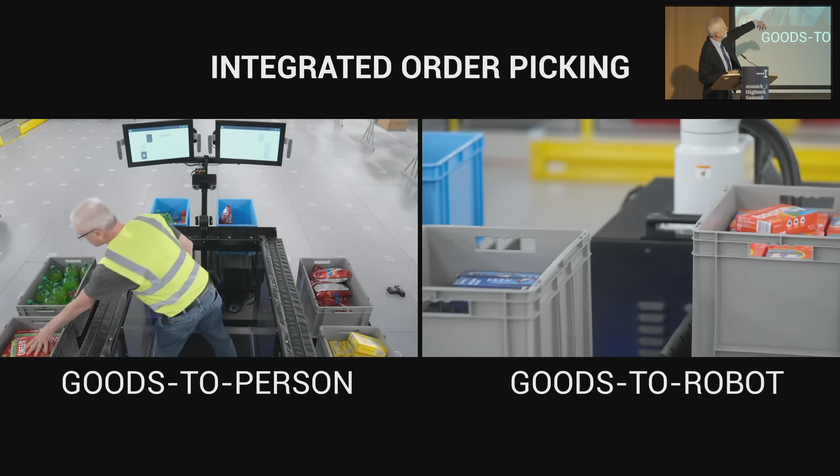So the shelves that are spread on the floor are like a low density, but very high-speed, agile system. And you can have people doing the picking if you're doing order fulfillment with this system. You can have robots doing the picking. You can have a mix of them.

The induction and the extraction are automated. The beautiful thing about this is that it does what we call aisle-ready replenishment. So when the stuff gets on the cart, when the stuff gets in the truck, it's organized in accordance with the aisles in the store that it's going to.

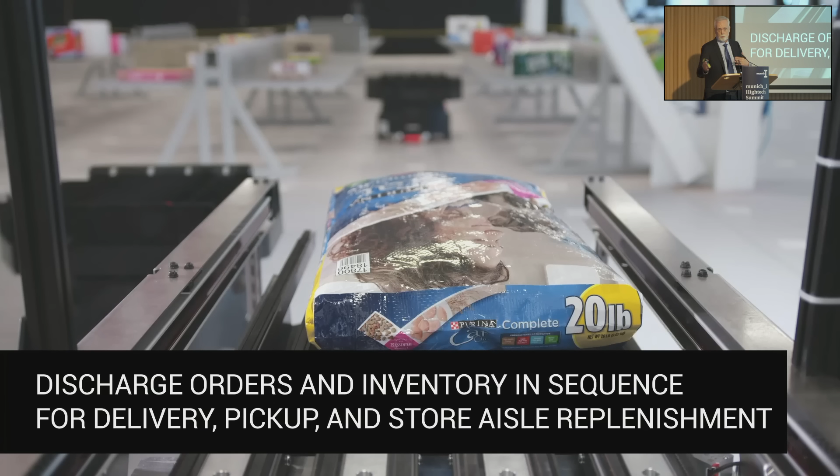So the robot system knows what the right order is so that when the stuff comes off the truck, it comes off in the right order. You just take this cart right to the end of the aisle and boom, boom, boom, boom, boom, and it's much more efficient. So like an hour or two rather than a day to unload a truck.

Yeah, what's the time situation? Am I out? We're over it. I'm over, okay. I don't know where I blew it, but somewhere I went over.

Thank you very much. Wonderful. Wonderful. Thank you so much. It was a great presentation, and I'm sure there are many excited people that would like to ask questions. Any questions?

Please, I have one question. If you look at your examples, there is no humanoid robot, there is no humanoid packing the stuff in the boxes, but you have suction manipulators and things like this. So how important is it to think outside of the box? Do we really need to imitate the human operation, or do you go other ways just to simplify the process? Well, one way to think about this is to think about the...

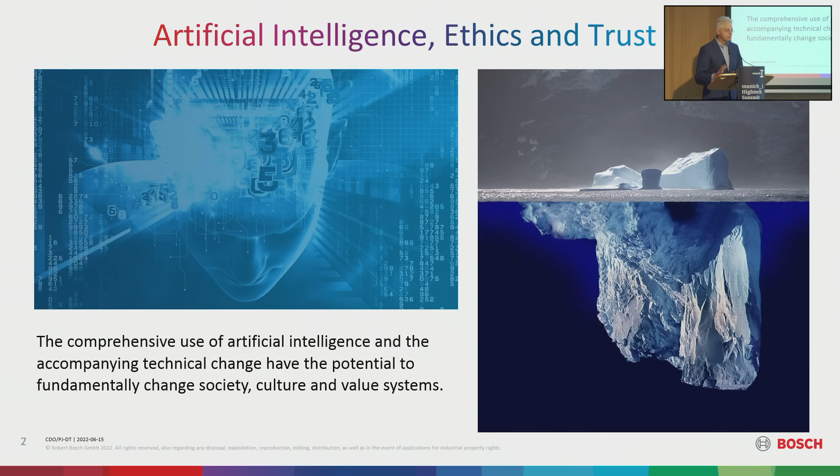And as Mr. Kegel rightly said earlier, working in standardization is no fun. Adding legislation for that doesn't make it better. However, it's important in order to bring the products to the market.

I won't get into details because this is rather philosophical. However, if we seek foundations of trust, you have to stick either with universal principles like Plato, or more empirically based like Aristotle, and this was more or less the way Europe decided to follow.

Thus our notion of trust - as assured reliance on the character, ability, strength of someone - has to do with experience gained over time. I'll give you an example: I'm sure you have trust in your parents, but probably you don't trust your parents to fly a plane.

So for trust we need competence, entitlement, positive mindset, and a certain transparency so that we understand the underlying logic of that. And if all that is given, we have a configuration where we trust even to board a plane and use it accordingly.

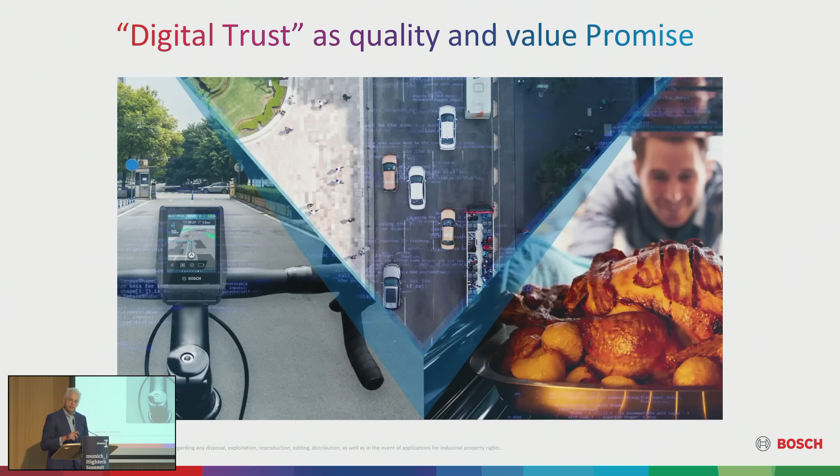Investing in trust makes a lot of sense, because for businesses and industry, I think it's still valid what Robert Bosch earlier said: I would rather lose money than trust. So investing in trust makes a lot of sense. And since we have no perception of trust, no sensors of trust, we need approaches to approximate that. So this talk was quite different from the other talks of this afternoon session, but I hope you take something with you anyway. Thanks for your kind attention.

Wonderful, Christoph. Thank you very much for this introduction to the trustworthiness of our robots. There may be questions concerning this topic. Any question that you... go ahead.

In what part of the scale do you put your own products that you're developing in this area, in AI? We as Bosch always try to be leading in every aspect. So all A rankings, yeah, on all five categories. That's at least the aspiration level.

Another question: so this requires an education of the consumers as well, right, to be able to interpret the level of this labeling. This seems to be quite difficult, right? Because even for the experts, determining the level of trust in an AI system is difficult. And now with these labels, we need the consumers to be able to interpret them as well. So is there an educational aspect of it for the general public, or a communication aspect in that as well?